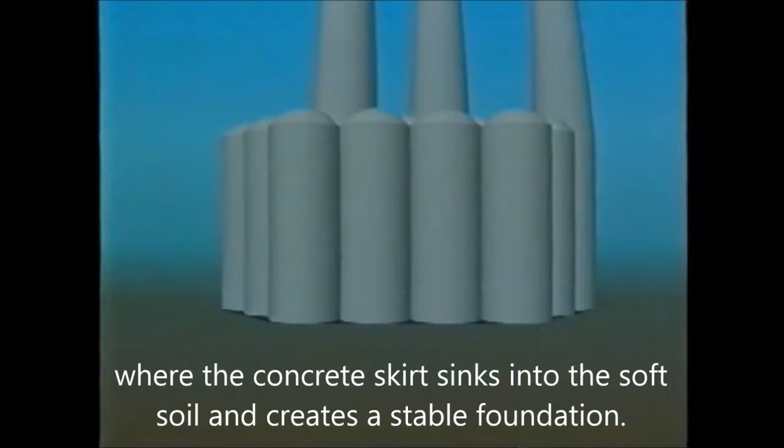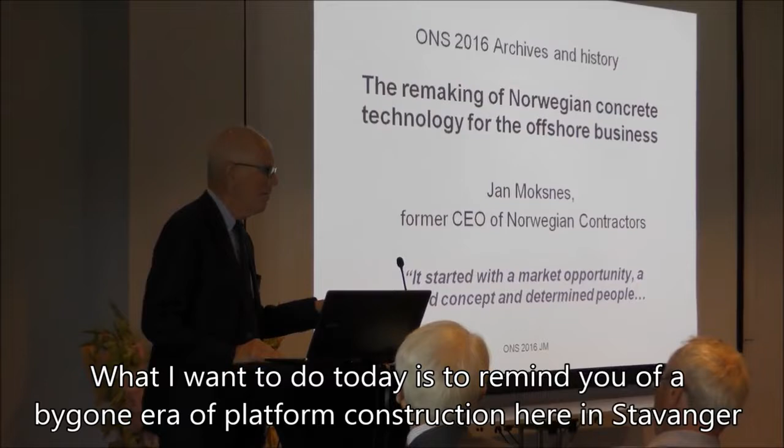Today is to remind you of the bygone era of platform construction here in Stavanger. It came to an end, but I would wish to point out really how the legacy from this era can be used and is being used to capture new opportunities.

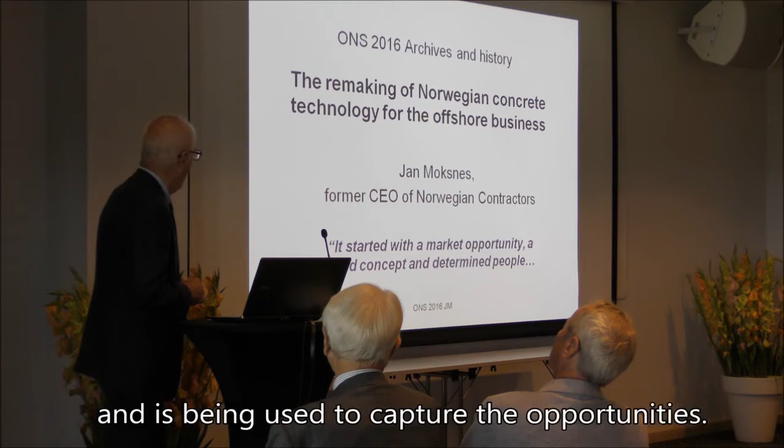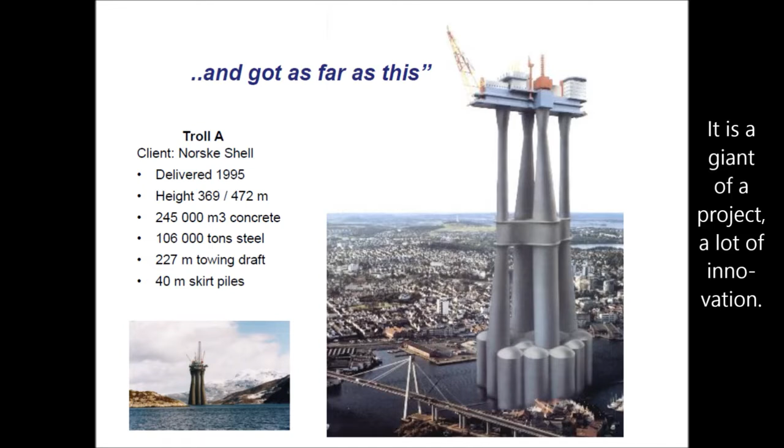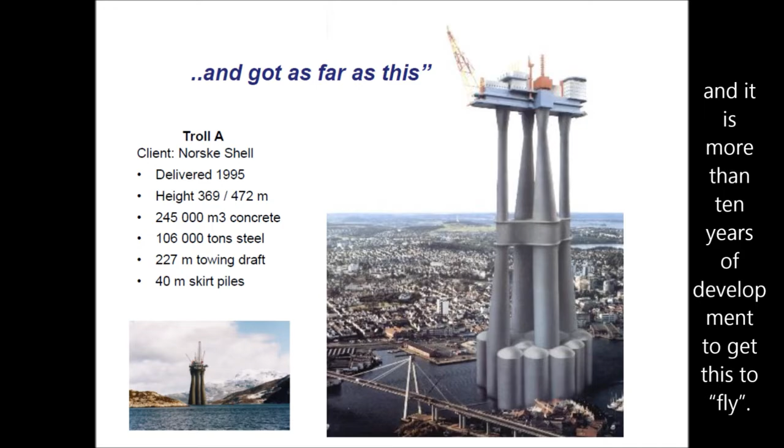And this, like so many other things in life, started with an opportunity, market opportunity, a new concept, and of course some very determined people. But of course it is a giant of a project, a lot of innovation. It was built from 1991 to 95, but really Troll was discovered in 1980, and it took more than 10 years of development to get this to fly.

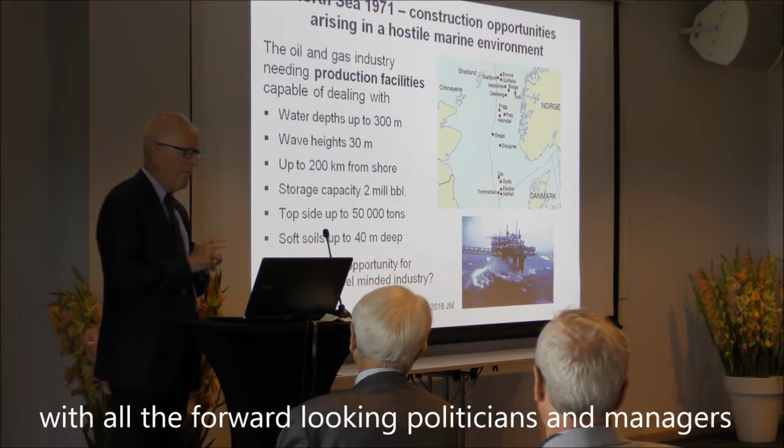And it all started, of course, like we've heard already this morning, for us in 1971, when all the very forward-looking politicians and managers managed to secure the southern part of the North Sea. The oil companies wanted to develop oil fields, and this was a challenge that people would eventually be facing. And when you look at that list, water depths, wave heights, 30 meters wave height, you imagine, in the middle of the North Sea, up to 200 kilometers from land.

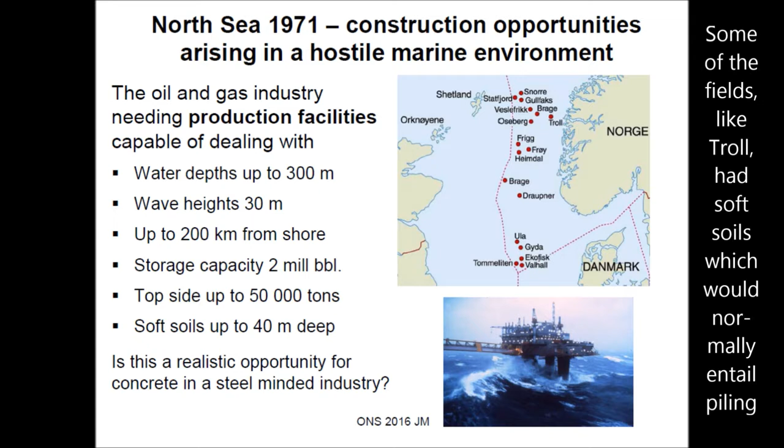They needed to store oil. That was one of the big ideas with the concrete platforms. They could store oil or gas in between in bad weather. Topsides up to 50,000 tons had to be taken out and ready to start to produce at the field. And we had in some of the fields, like Troll, soft soils, which would normally entail piling and foundation works, which would be impossible at that depth and at that location. So the concept had to cover that.

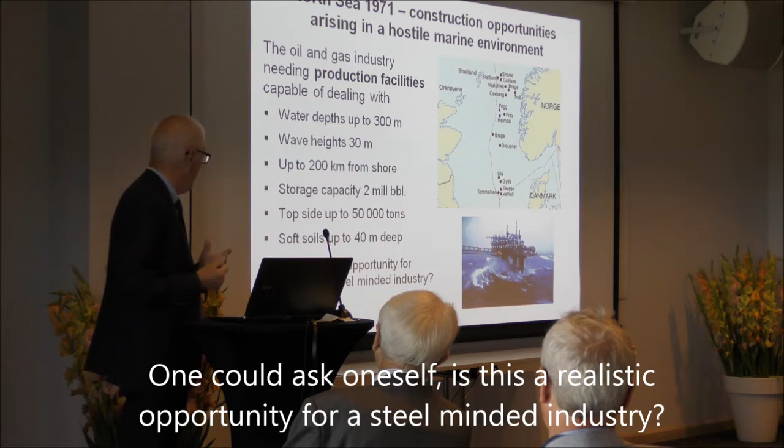And you could ask yourself, is this a realistic opportunity for a steel-minded industry? And you would be quite brave to say yes, I would like to say. But of course it started not with a big Troll, but with a small platform, smaller depth. Ekofisk, as you have seen this morning, played a very significant role, and then of course became the door opener for a lot of other things.

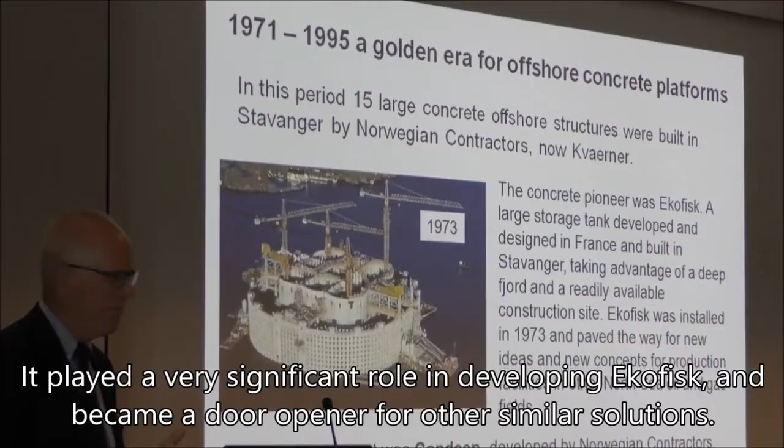It was developed in France, and I think it's an important point that we didn't invent the wheel. The concrete concept first came from France. As you saw from the previous map, one thing about the Norwegian coast, we have lots of deep fjords. They don't have that in France, and this was just a gift from nature. We had the ability to build these huge structures inshore in deep fjords. So Doris and Phillips came to Norway looking for a contractor. Luckily they found one, we took it on, delivered the platform on time, and installed it in 1973.

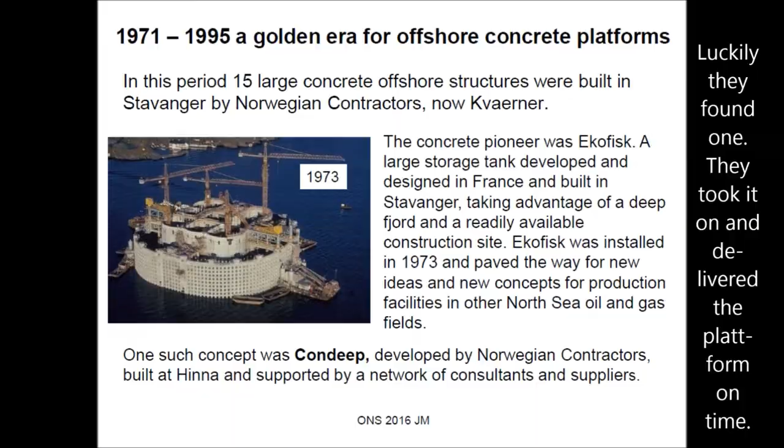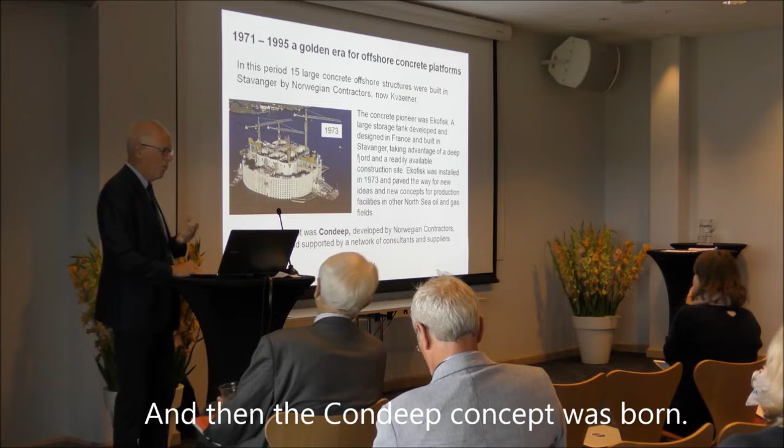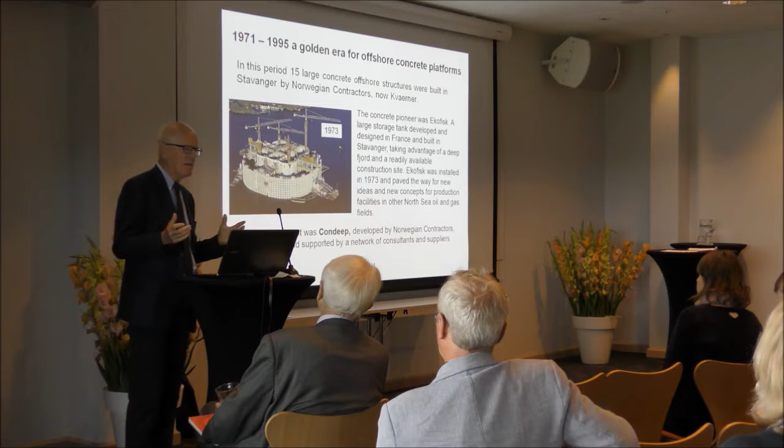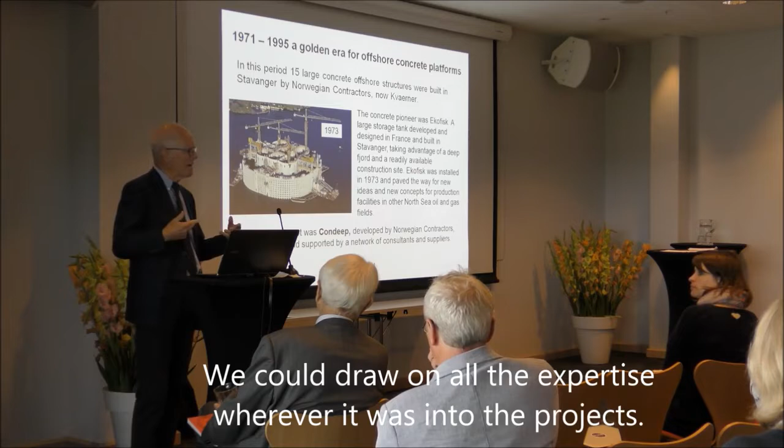And this started people thinking, you know, this was a storage tank. Could this be utilized also for other purposes, for drilling and production units? And then the Condeep concept was born, and Norwegian Contractors, and a series of Condeeps were built at Hinna, supported by a network of consultants and suppliers. This really, in those 20 or 25 years, became like a national industry. Everybody wanted to participate in these exciting projects, and we could draw on all the expertise wherever it was.

Now, how did these people have the guts to do this? Well, they had a background. In the 50s and 60s, we had a huge program in this country for hydropower developments. There are more than 1,000 dams all over the country, some of them huge concrete structures. We had the Tromsø Bridge in 1960, at that time a miracle of a bridge, designed and built in Norway. So we already had capacity and competence to do large, complex projects.

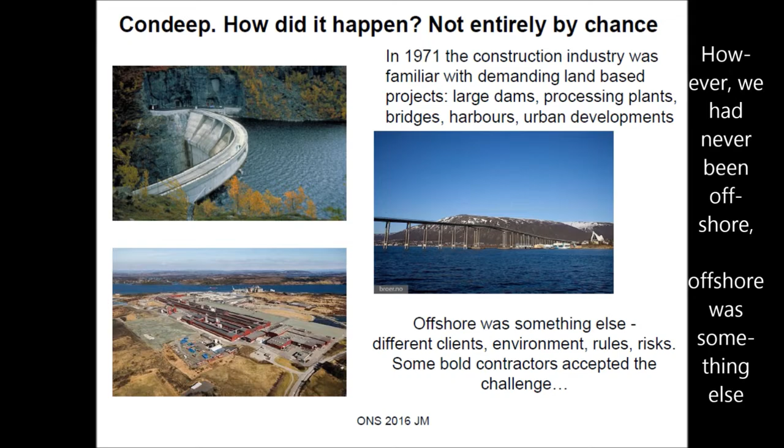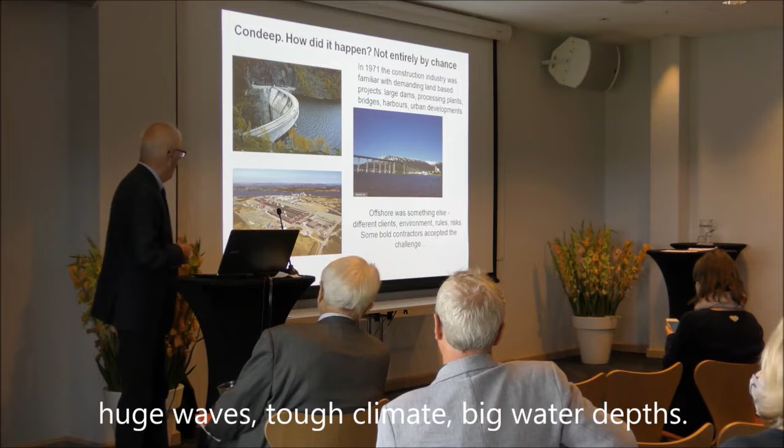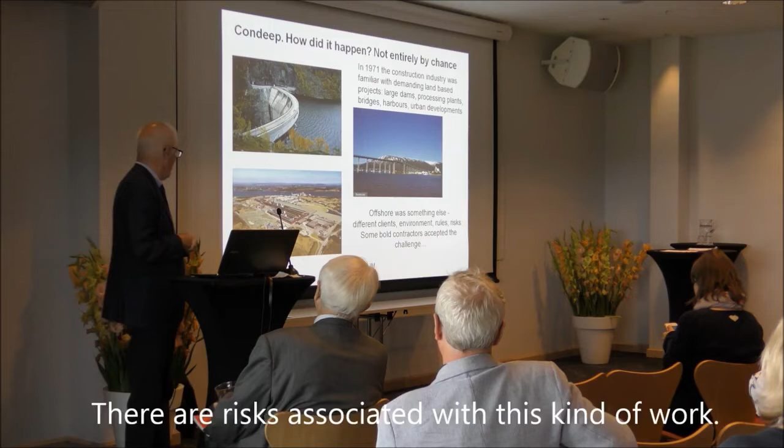However, we had never been offshore to that extent. So offshore was something else. Different clients, international companies, different environments, huge waves, tough climate, big water depths, different rules applied to this industry, and different risks. Because, of course, there are risks associated with this kind of work. So, some bold contractors accepted the challenge and moved in.

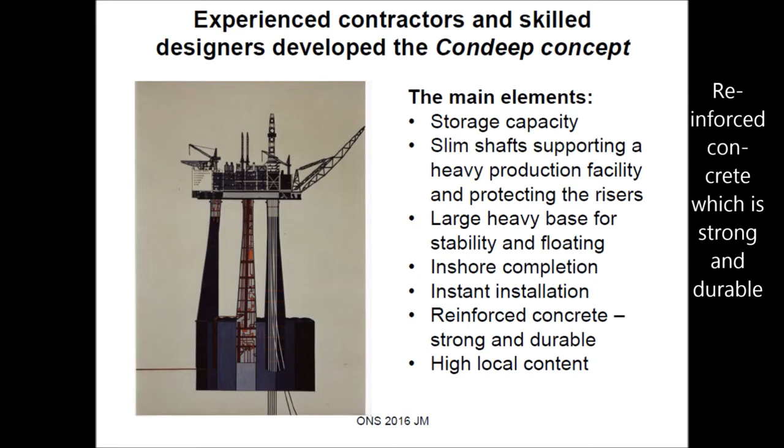At that time, in the early 70s, there were very few marine cranes and huge floating equipment that could be employed for these kinds of structures in the North Sea. So doing this inshore and taking it out was part of the clever idea. Reinforced concrete, which is strong and durable. A brief visit to the actual construction work.

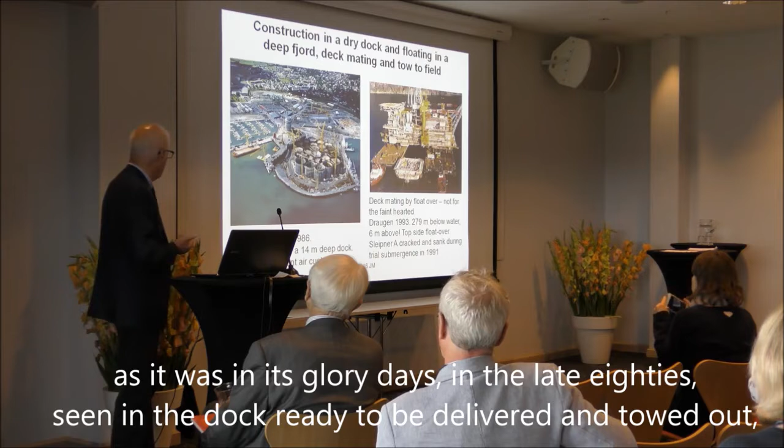On the left here, you see the Hinna yard as it was in its glory days in the late 80s. It's Gullfaks C in the dock, ready to be floated out. 42 meters tall in a 14-meter dock. Surely it won't float. No, it will not float. It will only be made to float by putting an enormous air cushion underneath the domes. 20 meters of compressed air it took to lift that off the dock and take it out, and then deballast and carry on working. On the right, you see the next stage, which is the deck mating.

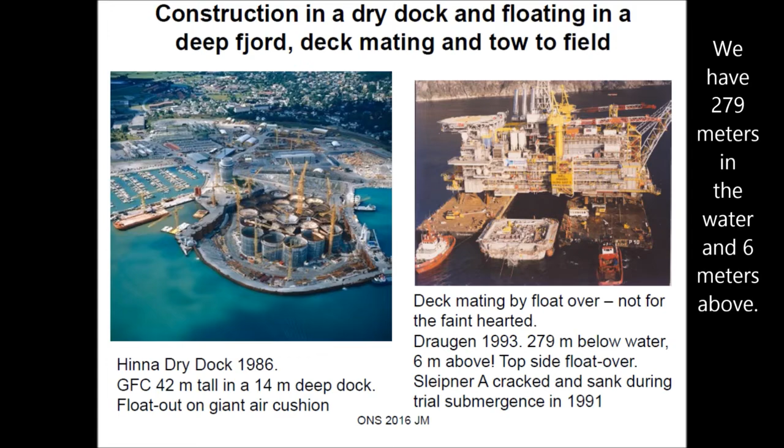The deck, of course, is built at the same time at a different yard, floated over on barges, and at this stage, the concrete platform is hardly visible. It's ballasted down to virtually the top of its shaft. In this case, it's Draugen. We have 279 meters below water and 6 meters above. It's almost mind-boggling, and of course, you all know that this is risky.

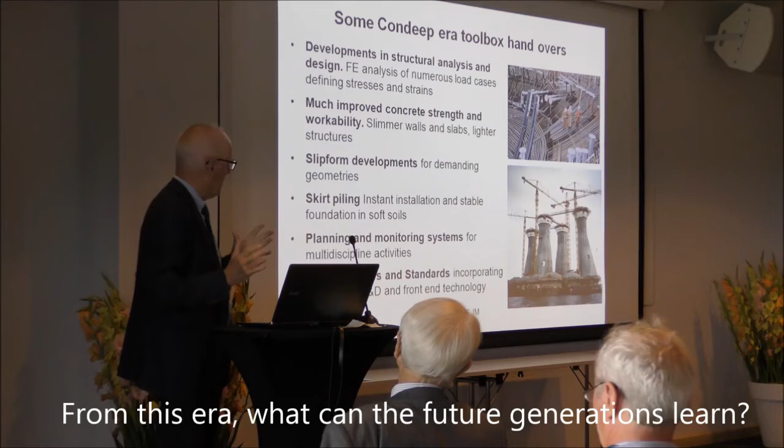So, from this era, of all these platforms, what sort of handovers do we have? What can the future generations learn? I've listed here maybe what, to my mind, are the most important items. Development in structural analysis and design: they made huge, what we call finite element analysis, which is computer-run programs to analyze these complex structures. We developed much improved concrete strength and workability. The concrete we had in the 1970s was not at all good for Troll. We couldn't build it with that kind of concrete.

So we went through 20 years of hard work and development to produce materials and methods that enabled us to do Troll. Slipform development: these were constructed by moving forms, which we lifted hydraulically and put concrete and steel in, so it sort of was a living mechanism when we built these tall shafts and cells. And the technology you can see on the right there, the shape, sloping, varying diameter, wall thickness, we were able to do all this in one continuous movement with hydraulic slipform.

Skirt piling, the piling system that we invented to be able to put this on 40 meters of soft soil. We brought the piles with us, we put them underneath, so that when it came out, we ballasted the platform and we pushed the skirts through the soft soil and into firm ground, and there it was, solid as rock.

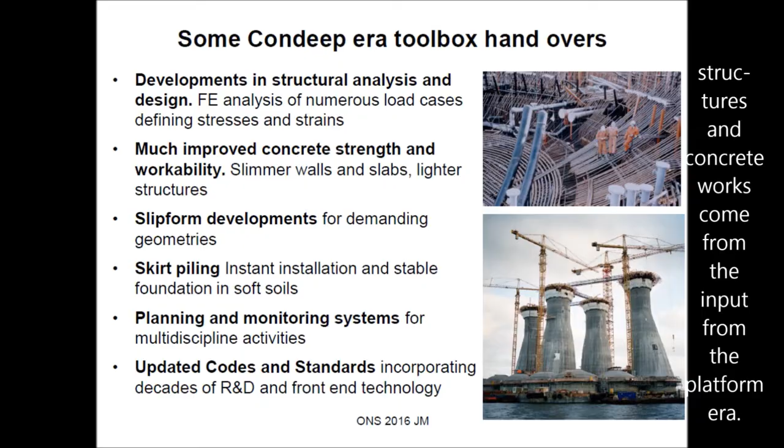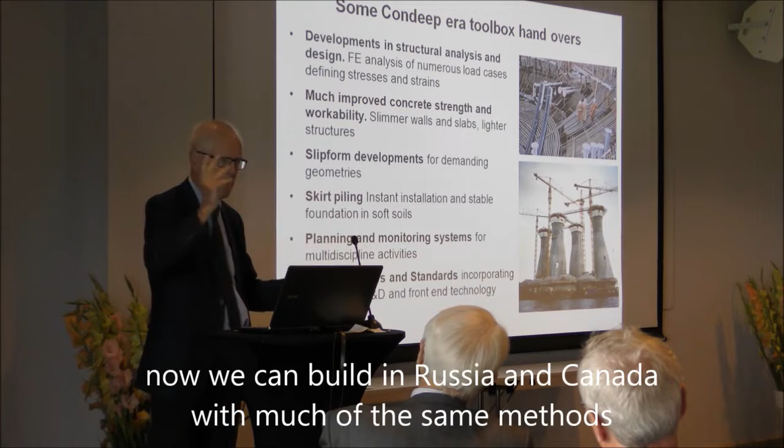Planning, obviously you realize from the previous slide that there's a lot of planning going into these projects, and monitoring. You need to measure all the time what you're doing, record it, then document it to the satisfaction of your clients. And of course in this process, updating codes and standards. A lot of today's standards on large structures and concrete works come from the platform era, with input from the platform era. So today we have a set of rules which enable us to do these things internationally. We have a common language in common codes and standards. So now we can build in Russia and Canada with much the same methods without having to go through huge processes of negotiation.

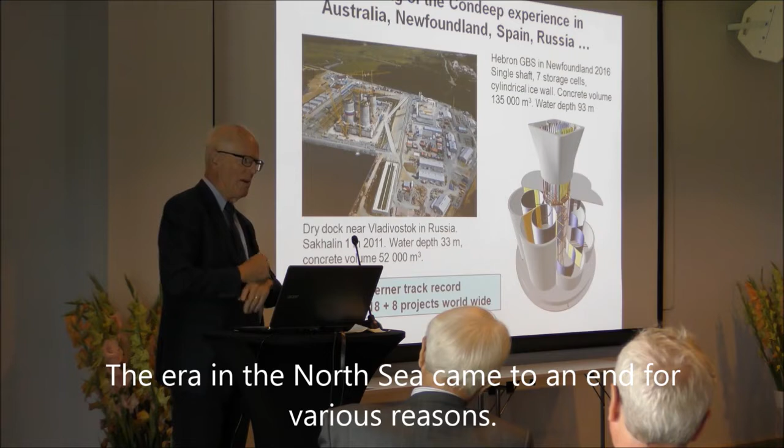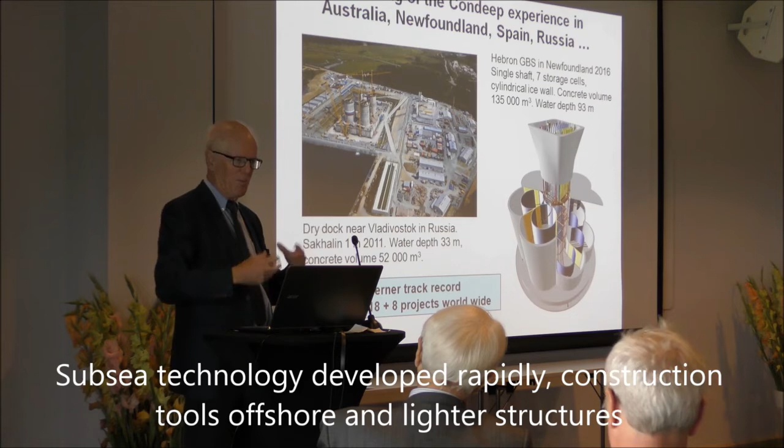The era in the North Sea came to an end, for various reasons. One being that, like we saw, all the network pipelines made the storage requirements superfluous. Subsea technology developed rapidly. Construction tools offshore enabled people to put in lighter structures for smaller developments and so on. So Condeep has built a platform in Russia. You've got lots of concrete platforms. One reason concrete was chosen there was the ice, moving ice in that particular oil field, and of course concrete is so robust it can also deal with that sort of issue.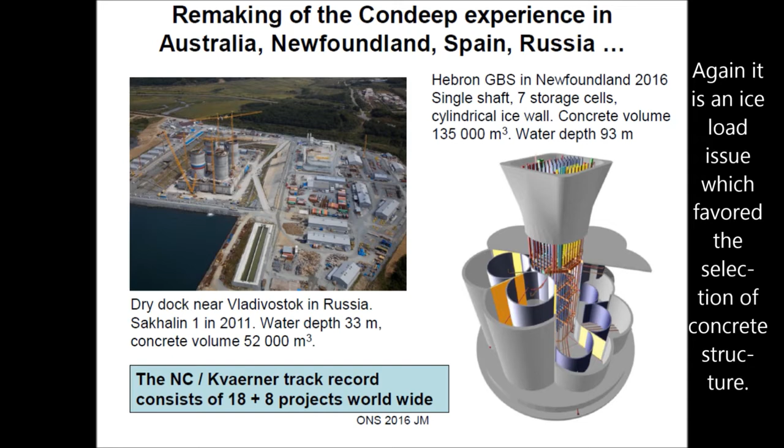And the same on the right, which is an ongoing project, the Hebron GBS in Newfoundland, being built at the moment, finished probably early next year. And again, it's an ice load issue which favored the selection of the concrete structure. And then we have what's happening here at the moment. We have the new E39.

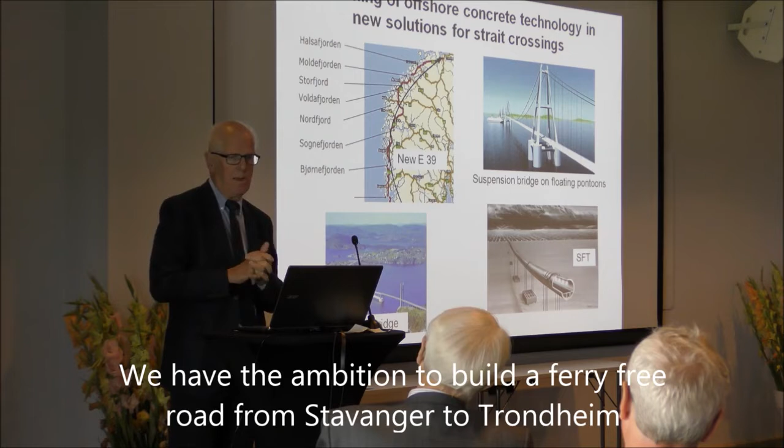You all know that we have the ambition to build a ferry-free road from Stavanger to Trondheim, more than 1,100 kilometers, and a number of deep fjords that need to be crossed, most of them more than 2 kilometers wide, and no current bridge design can span 2 kilometers, so we need to be clever, think of new ideas. And some such ideas are floating, as you see in the bottom there, which is incidentally the Nordhordland Bridge outside Bergen, built 20 years ago, on floating pontoons.

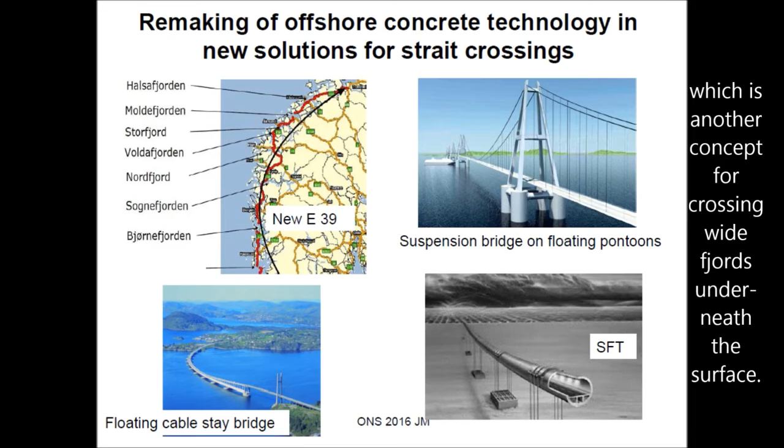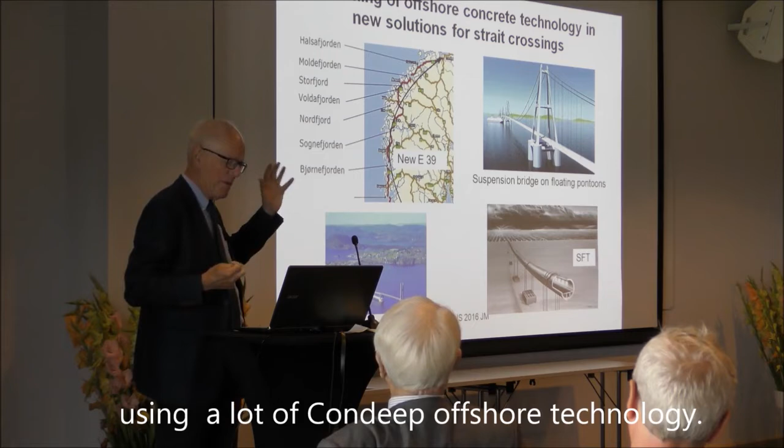On the right, we see a proposed suspension bridge on floating pontoons for the largest Sognefjord crossing. On the bottom you see the submerged floating tunnel, which is another concept for crossing wide fjords underneath the surface. And all these are existing ideas and developments. They will happen sooner or later, and involve an awful lot of what I would call Condeep technology, offshore technology.

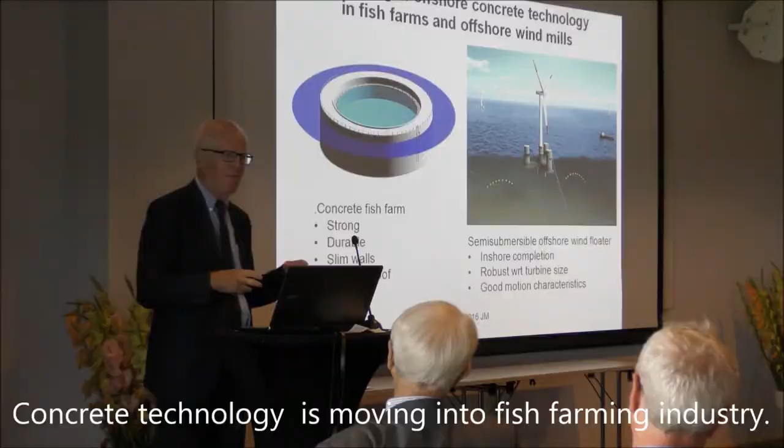Also in fish farming, concrete is moving into that arena. Maybe the concept on the left is just one of them. Strong, durable, escape-proof, and also able to catch the rubbish, which is becoming a growing problem for fish farming. On the right, you see a proposed floating windmill. Of course, new energy off the coast in deep water. You can have them floating on a pontoon-like structure like that.

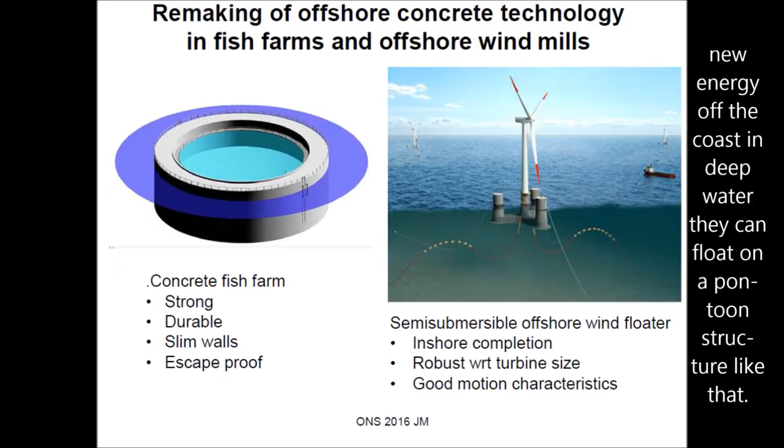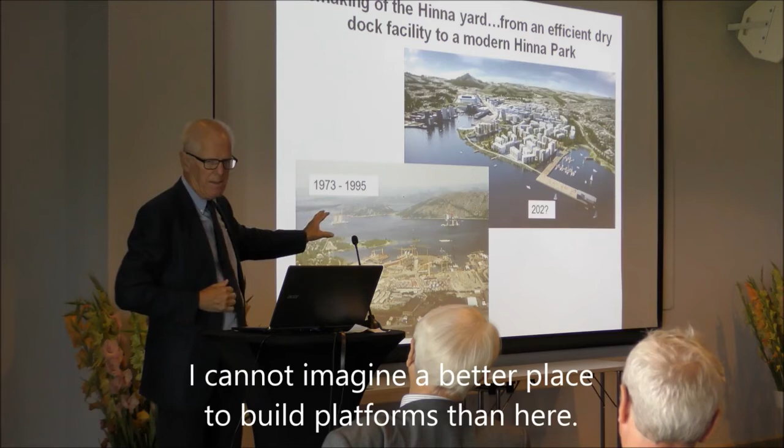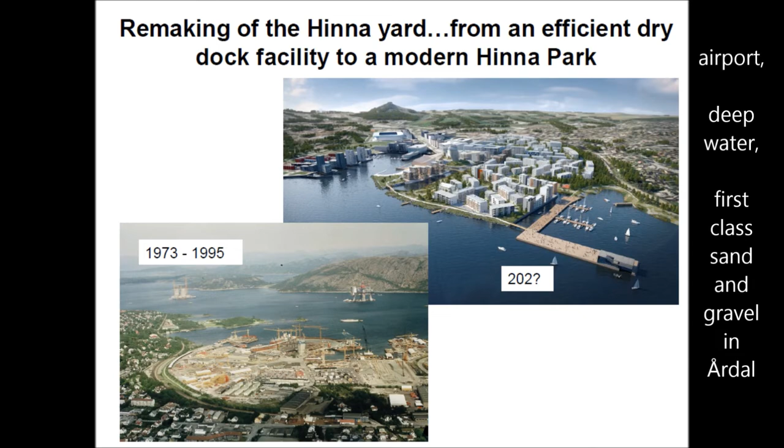And finally, a different scenario, Hinna, which was our perfect working yard in the 70s, 80s, and 90s. I can't imagine a better place to build platforms than here. We had a large area, we had a very supportive local authority, we had all the services we needed around us, airport, deep water, we had first-class sand and gravel in Årdal, the raw material for the concrete. Perfect.

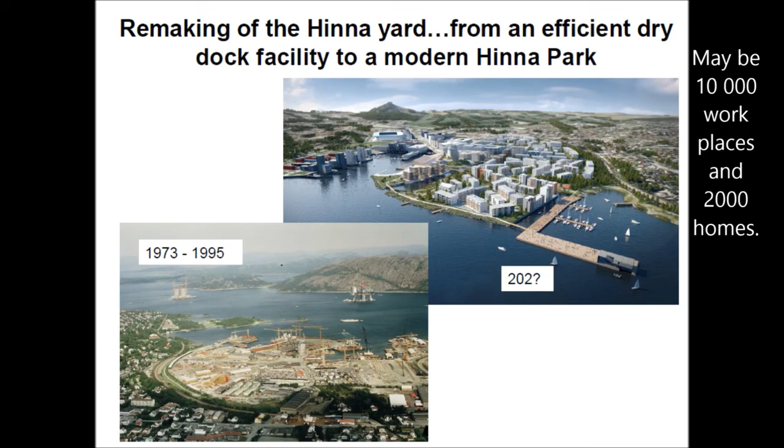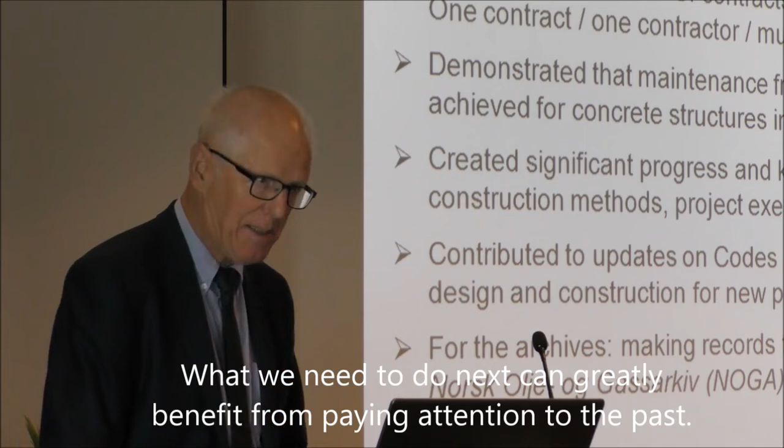And then when it all came to an end, we see the proposed Hinna Park. And in maybe 10, 20 years' time, it will look something like this. Maybe 10,000 workplaces and 2,000 homes. It came off as a spin-off, really, from the industrial activity that started there 40 years ago. What we need to do next can greatly benefit from paying attention to what we did in the past. I think that's the lesson that we're all trying to live with and to learn and to remember.